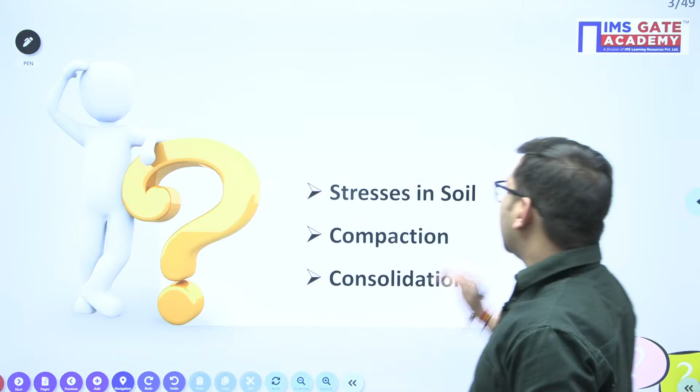Our today's agenda will be first to cover stresses in soil, compaction and consolidation. Out of this topic, consolidation is very much important, it is very much important for your exam. You are going to definitely get one question in GATE 2023 from this particular topic. Hi Sandeep sir.

Okay, we'll move to the next part. If we talk about stresses in soil, what did we study in effective stress? In the effective stress chapter, we studied what will be the stress at any particular depth due to the weight of soil and any particular surcharge load.

But now stresses in soil, again we are studying this topic. Why? In this topic, we are going to discuss what will be the stresses at any particular depth. Your Boussinesq theory will be enough, that I'll explain.

So stresses in soil, we are discussing here that if there is any superstructure load, this load is important for you. When you construct any superstructure over your soil, that building is going to transfer some load to your soil. Now, how much stresses will get generated due to the superstructure load, that we are going to see in stresses in soil.

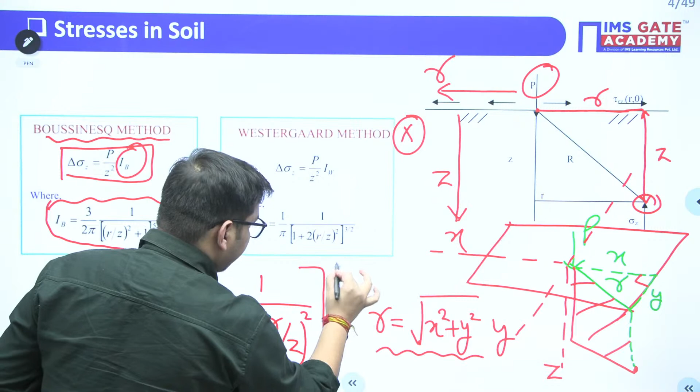It is given by P upon Z square, that is load value divided by depth square into Boussinesq factor, the Boussinesq impact factor IB. It is given as 3 upon 2 pi, into 1 upon 1 plus r by z whole square, whole to the power 5 by 2. This is your IB value. If you multiply it with load divided by this depth square, it is going to give you the stress value at this particular point.

Now, if you need to find out, sometimes it may ask for the shear stress value. This was the normal stress. Sometimes it may ask for the shear stress value. Your shear stress value, it will be normal stress at any particular r by z value multiplied by r by z. So this will be the shear stress at that particular point.

Other than that, there can be different types of loading. The formulas for those are given in your particular notes also. So these are particularly formula-based questions only.

Now our main point of this particular topic is consolidation in soil. So what is consolidation of soil? When there is a superstructure load, due to that there will be generation of stresses. Yeah, we will solve the problems. Definitely we are going to solve the problems. Just I'll give you an insight of 5 minutes, after that we are going to see the questions only.

So if I discuss about the consolidation of soil, we know that when there is a superstructure load, due to that particular stress value, there will be expulsion of pore water from the voids of the soil. Due to that particular stress value or due to this expulsion of pore water, there will be change in volume, or decrease in volume of soil. This particular change in volume or decrease in volume, we call it as consolidation.

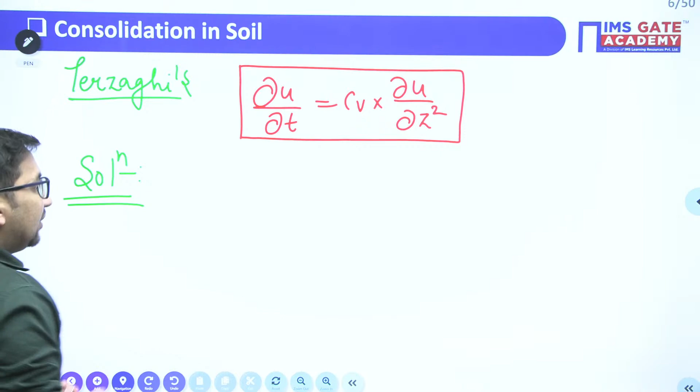So this is the particular Terzaghi's equation. Now if we talk about the solution of this Terzaghi's equation, one of the solutions is your degree of consolidation, mainly represented by U.

What does this degree of consolidation suggest? This degree of consolidation is the proportion of total consolidation that gets completed at any particular instant of time. So degree of consolidation can be said to be whatever consolidation occurs at any particular time divided by total consolidation, sometimes called total settlement. If I represent it in percentage, you can multiply it by 100.

In terms of void ratio also we can explain this, as there will be reduction in the void ratio. You can also explain it with reduction in pore water pressure. Let's suppose Ui is your initial pore water pressure. At any particular time, the pore water pressure reduces from the initial value to this Ut value. How much will be the total reduction? It will be from the initial value to zero. When the excess pore water pressure becomes zero, it means at that point your consolidation process is complete. So this is also sometimes how you represent degree of consolidation.

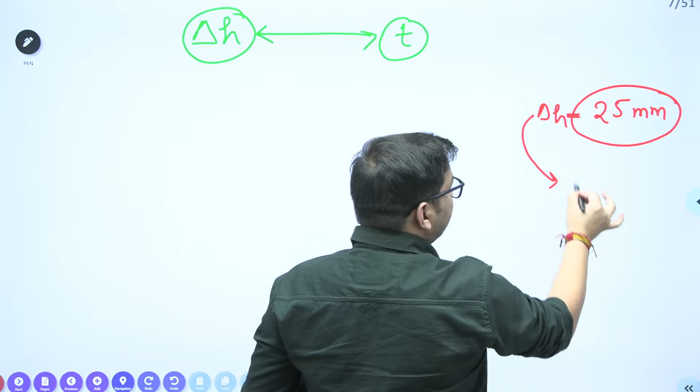Like it will ask you, okay, there is 25 mm of settlement, it will give you the properties of soil, and it will ask how much time it will require for this particular settlement value. This is one type of question.

The second type of question is, it will give you the time. Let's suppose it has given you the time as 3 years, and it will ask you how much settlement will be there in these 3 years. So these are the two types of questions generally asked in your exam.

How to process this type of question? If delta H is given to me, and I'm assuming total settlement is also known to me, I can find out what is my degree of consolidation. That is delta H upon capital delta H into 100, if I'm taking it in percentage. Now this degree of consolidation is related with the time factor. So time factor is the quantity which relates degree of consolidation, or relates this settlement value, with time.

Now your Tv is equal to pi by 4 of U squared. What is this U? U is your degree of consolidation, here in decimals. This particular formula is valid when your U is less than 60%.

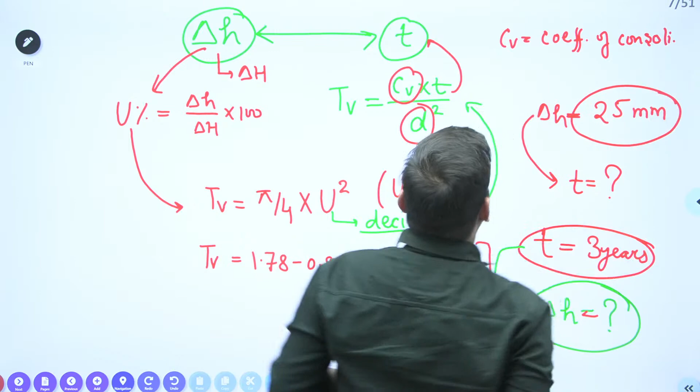Here CV, it is your coefficient of consolidation. What is this D? D is your length of drainage path.

Sir, what is this length of drainage path? It is the particular distance, or the maximum distance which a water molecule has to travel before expelling out from the clay layer. Why am I saying clay layer? As we generally focus about the consolidation of clay layer only, or clay soil only.

When there is a construction, that particular coarse grained soil, that is your sand, it is having a greater permeability. Your permeability of coarse grained soil is more, that is in sand. So whatever consolidation happens in your coarse grained soil, it will be done during the construction period of your building only. Now for us, what is more important?

Let's suppose we have constructed one building today, and after 3 or 4 years, if my soil below our foundation is going to get settled, that is mainly the problem for us. For a civil engineer, that is mainly the problem. We know that the settlement of sand will be completed within the construction period only. It means the problematic soil for us from the consolidation point of view is clay. So that's why we mainly take into account the consolidation of clay only.

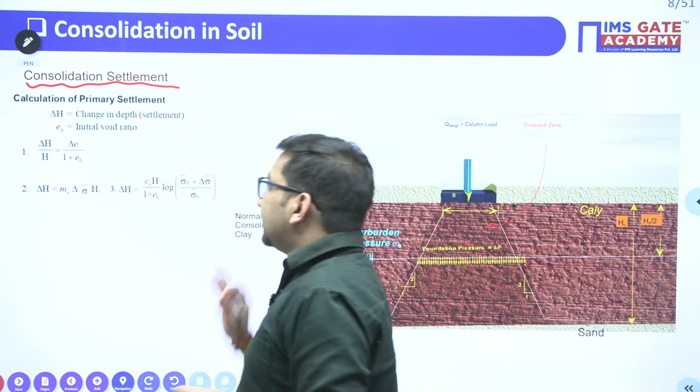Now there are mainly 3 formulas by which you can find out the consolidation. All the formulas are correlated. If this particular formula is known to you, you can derive all other formulas also. So what is your first formula?

Delta H is your total settlement. Remember, this is your ultimate settlement value. So your ultimate settlement upon thickness of compressible layer is given as delta E, change in void ratio, upon 1 plus E naught.

Second formula is your settlement value. It is nothing but thickness of compressible layer into MV. MV is your coefficient of volume compressibility into change in effective stress. Now this is the particular term which is important for you.

All other terms you might be knowing. This is your coefficient of volume compressibility. The formula for this is MV is equal to AV upon 1 plus E naught. And what is this AV? This AV is your coefficient of compressibility, which is nothing but the slope of your void ratio versus effective stress graph.

So this is nothing but change in void ratio with change in effective stress. When the stress value increases, there will obviously be a decrease in the void ratio, given by that particular graph slope, that is your coefficient of compressibility. So these are some coefficients used in this particular chapter. Now this sigma bar, delta sigma bar, this is the particular important term for you.

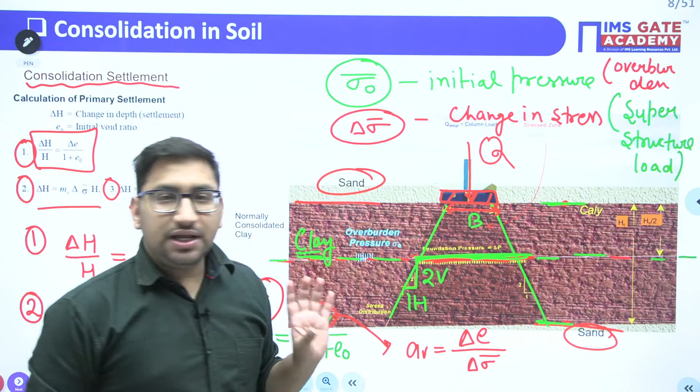So let's suppose this width is B. It means I need to find out this particular dimension. Let's suppose this particular depth is Z, meaning I am moving Z down. If I am moving Z down, this will be 0.5 times Z. Or just for now, I'll write it as n times Z, as this n value can be anything.

I am assuming that it is n horizontal to 1 vertical. Clear? The load distribution is 1 vertical to n horizontal, or you can say n horizontal to 1 vertical, right? So it will be your n into Z. This particular value will also be n into Z.

So you can find out what will be the dimension at the center of the compressible layer. If you divide that particular load with this particular area, you get delta sigma bar. And if you add these two values, you get the final stress value, sigma 1 bar, that is nothing but sigma naught bar plus delta sigma bar. So these are the parameters needed to calculate the settlement value.

Another formula for the calculation of settlement is delta H. These are two formulas, and the third formula is... Let me write all the formulas again. It is delta H upon H is equal to delta E upon 1 plus E naught. This is your first formula. Second formula is delta H is equal to H into mv into delta sigma bar.

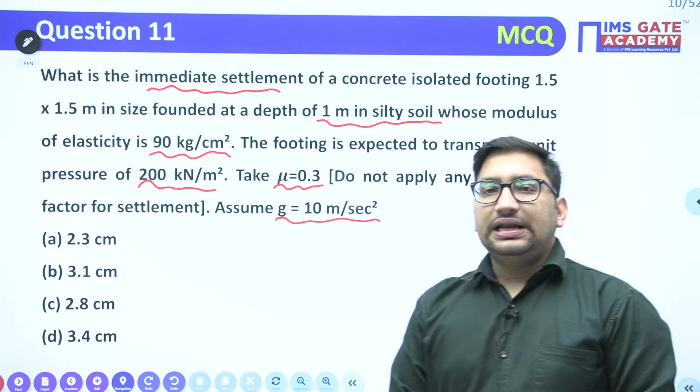If you remember the formula for calculation of immediate settlement, just comment in the chat box, otherwise I will give you the formula. Yeah, Rahul. If you remember the formula, just type in the comment box, otherwise I'll give you the formula. Yes, Rakesh, Prashant. If you are in the live session, just comment so that it will be clear to me that you are also there, right? So just show your presence by commenting on the session.

Okay, I'll just let you know. We know that the immediate settlement, or sometimes we call it elastic settlement, it is your stress value Q into width of foundation into 1 minus mu square into IT upon ES, right? Here mu we take for the soil, E also we take for the soil. Sometimes it may give you these particular values for foundation also, right? So always remember these are the values. Mu is your Poisson's ratio, E is your modulus of elasticity of your soil, right? Q is the pressure value at the base of the foundation, B is your width of foundation, IT is your influence factor, mainly depends upon the shape of your foundation, right?

So this particular value you can take it as 1, as we do not have to apply any correction factor. Clear? Now put the values and give me the answer. You also will need to manage the units, so focus on the units also. We want the settlement value in centimeters.

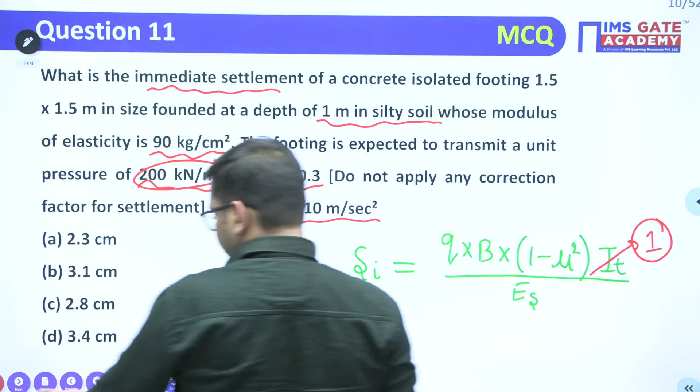The settlement value is Q into B into 1 minus mu square, into IT upon ES. Your Q value is 200 kilonewton per meter square, into 10 to the power 3. It will now be Newton per meter square into 10 to the power minus 4. Now it is Newton per centimeter square, right?

And if I divide it with G, it will be in kg per centimeter square. If I divide it with G, now it will be in kg per centimeter square. So we have converted this into 1 minus 0.3 square upon 90. So this 90 is already in kg per centimeter square, right?

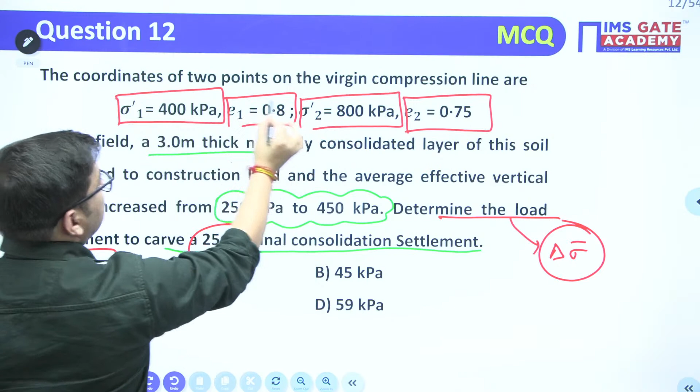Now what are the data given to you? There are some points given on this particular compression line. If I take this in terms of log, I know I am going to get a straight line in that case. Let's suppose this is the particular compression line.

On this compression line, 2 points are given to you. Sigma 1 bar is 400, corresponding to 0.8 void ratio. Your void ratio is 0.8 corresponding to 400, and corresponding to 800 it is 0.75. So when stress value increases from 400 to 800, your void ratio decreases to 0.75.

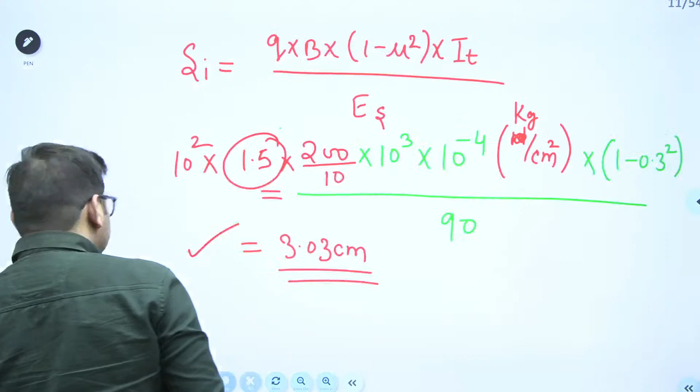Also, it is saying that in the field, when there is construction, the load increased from 250 kilopascal to 450 kilopascal. It means initially, before construction, the stress on the soil was 250 kilopascal. Can I say that this 250 kilopascal is my initial stress? So initial stress, sigma naught bar, that particular value is 250.

Now it is asking that if the settlement value is 25 mm, what will be the change in effective stress, so that the final settlement value will be 25 mm.

Now you know that if I apply this particular formula, delta H is equal to H into Cc, divided by 1 plus E naught, into log base 10 of sigma naught bar plus delta sigma bar, upon sigma naught bar. Out of this, what value is needed?

This E naught value, the initial void ratio, I need. Cc value I need. Sigma naught bar is known to me, 250. Delta sigma bar is what's asked. Is H value given or not?

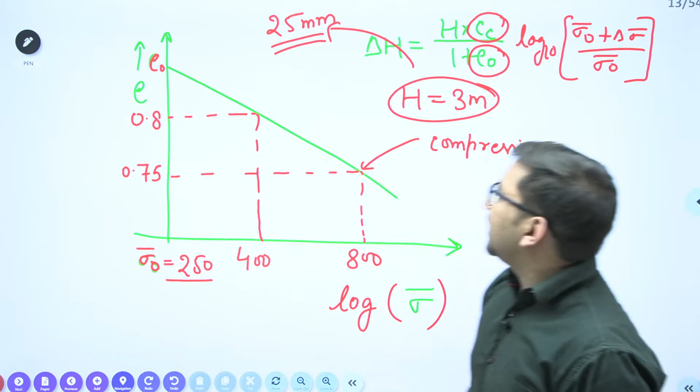Now based on this data, to calculate this change in effective stress, you will need this Cc value and this E naught value. Can you tell me how you will proceed for these two values? What will be this Cc value? Can you calculate it from the graph?

We know that Cc, the coefficient of compression, is nothing but the slope of this particular curve. So if I say this as sigma 1 and this as sigma 2, this as E1, this as E2, I know what the Cc value will be: E1 minus E2, upon log of sigma 2 upon sigma 1.

That is 0.8 minus 0.75, divided by log of 800 divided by 400. Can you give me the value of Cc? Here your multiple concepts will be used. Give me the value of Cc, the coefficient of compression. The answer is 0.166.

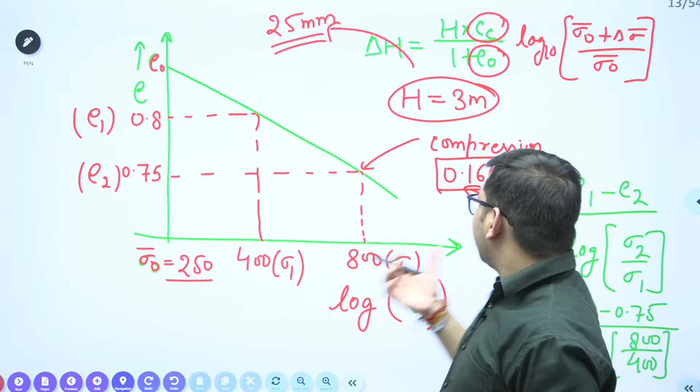Now, can I say that the slope of this particular line is constant? The slope of this particular line is constant, and which is given by this Cc value. I can also write the slope of this particular line for these two values. Here the slope is Cc, here also the slope is Cc. If I write for these two points, can I also write that Cc is equal to...

E naught, this particular value, minus E1, upon log 400 divided by 250. Just comment in the comment box whether it is correct or not. Can I write Cc is equal to E naught minus E1 upon log 400 upon 250 for this particular portion?

Slope is what? It is change in y with respect to change in x, right? So Cc value now is known to you. This particular value is known to you. E1 value is known to you, 0.8. You can find out what will be the E naught value. Give me the value of E naught.

Yes, Prashant, very good. Yeah, thank you, Anjali. Give me the value of E naught.

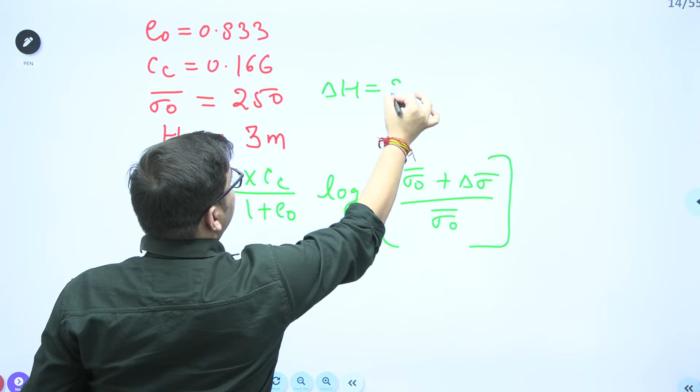Delta H is also given. Delta H is your 25 centimeter, sorry, 25 mm. Clear? I'll just check. It is your 25 mm. Yes, clear? So we can just say it is in meter. So put the values.

It will be H value is 3, into Cc value is 0.166 upon 1 plus E naught value. E naught value is your 0.833, into log base 10 of sigma naught bar value, that is your 250 plus delta sigma bar, which is needed to calculate, upon 250.

Just solve this. You can just solve for this. If you take the inverse of this log, then only you can find out this delta sigma bar value. Just solve this particular question, Prashant.

You are getting it as 59.03. Okay, it is 59.03. So you are getting from here that delta sigma bar is 59.03 kilonewton per meter square.

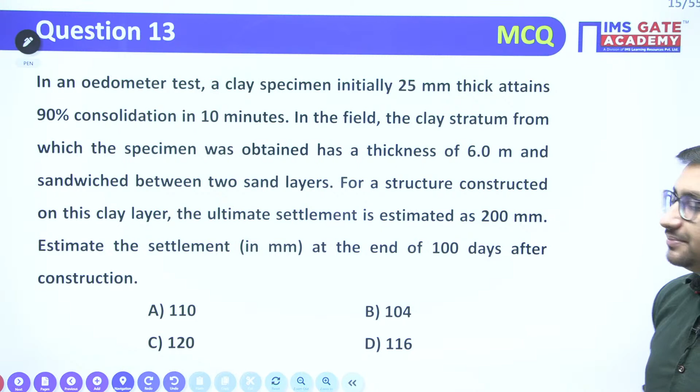And try this particular next question. This is another type of question which can be asked to you in the exam. We have discussed about the different types of questions that can be asked from this particular chapter. This is another part of that. Just try to read and give me the answer. This consolidation chapter is going to be very important for you. These types of questions can be asked to you. So I'll just read the question for you.

I'll simplify this question. In an oedometer test, this is the particular test used for the calculation of your settlement value or consolidation value. A clay specimen initially 25 mm thick attains 90% of consolidation in 10 minutes. Now this is the lab data given to you. Now about field, it is saying that the same clay layer, the clay stratum from which the specimen was obtained has a thickness of 6 meter, sandwiched between two sand layers. For a structure constructed on this clay layer, the ultimate settlement is estimated as 200 mm.

Estimate the settlement at the end of 100 days. Estimate the settlement at 100 days.

So, some lab data is given to you. You have conducted one test in lab and found that the 25 mm thick sample layer will undergo 90% consolidation in 10 minutes. Now, using this lab data, you need to find out what will be the estimated settlement in 100 days in your field. That you need to find out.

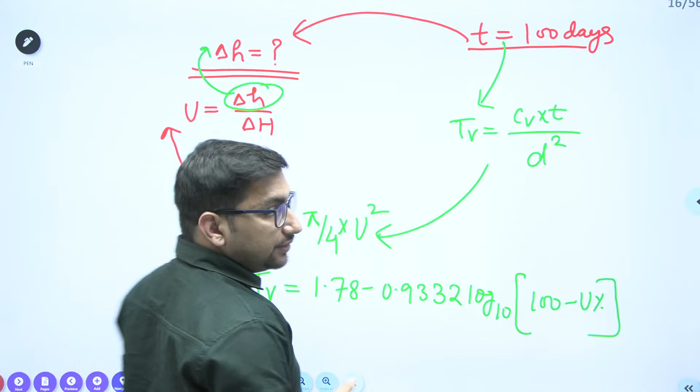From here, once U value is known to you, then you can proceed to U is equal to delta h upon delta capital H, and from here you can find out this.

Now try to see what data are given. Based on this particular chart, we'll try to see what data are given to me. For 100 days I want that TV value, it means I want the CV value. This T value is known, this CV value I have to find out. This D value is your length of drainage path.

Now try to see, for the field data, it is having a thickness of 6 meter and it is sandwiched between two sand layers. So there is a 6 meter thick clay layer, and it is sandwiched between sand. Here also it is sand, here also it is sand. Can you tell me what will be the D value, the length of drainage path?

Just put it in the comment box. If you know the concept of how to find out the length of drainage path, let me know what will be the drainage path in this particular case. I have told you that the length of drainage path is the maximum length which one water particle has to move before expelling out from this particular clay layer.

Give me the answer. It will be 3 meter, right? So I know that the water molecule can remove from the sand layer either at the bottom or at the top. So the particle which is at center has to travel the maximum distance. What will be this? 3 meter. This particular condition we call a double drainage condition.

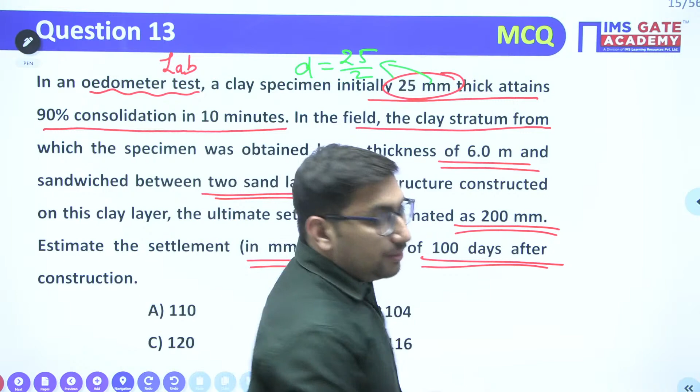There is a sample of 25 mm. If you have taken this particular sample from this clay layer, you have to assume the double drainage condition. So for this particular value, what will be my D value? It will be 25 by 2. You cannot take the 6 meter clay layer to the lab, right? So from that layer you have just taken one particular sample of 25 mm and conducted the oedometer test on that 25 mm thick sample.

So for the lab, what will be the thickness of my clay layer? It will be 25 mm. So what will be the drainage path in lab? It will be 25 by 2, right? It means D value is known to me.

Degree of consolidation is known to me, 90%, and time is known to me. So first I will write for the lab. If I write for lab, what is the data? In lab I know the thickness of sample, that is 25 mm. So from here I can say that my drainage path, it will be 25 by 2 mm.

Degree of consolidation is given to you, that is 90%, and it takes a time of 10 minutes. Now this particular data is mainly given for the calculation of CV. For calculation of CV, this particular formula we can use: TV is equal to CV into T by D square. But to use this formula, I will need this TV value.

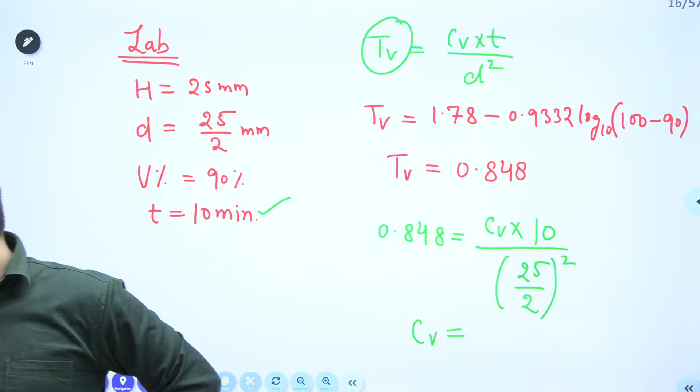It will be in mm square per minute. Give me the value in this particular unit only. What is the CV value you are getting from here?

Yes, Prashant? I am getting it as 13.23. Just also check your answer. Just let me know in the chat box if you are getting the same answer for the CV.

Now, this particular soil you are not changing. Whatever is the soil in lab, same soil it is in the field. For this particular soil only you have conducted the test. It means the CV value in the clay layer which is in lab, this particular CV will be same for yours, and this will be in mm square per minute, right? These were in mm only, your 25 was in mm, so it will be mm square per minute only.

We can change it later, right? Yeah, it will be 13.23 in that case. Right? So this is your CV value. Now I can use this CV value, 13.23, here. I have found this particular value as 13.23.

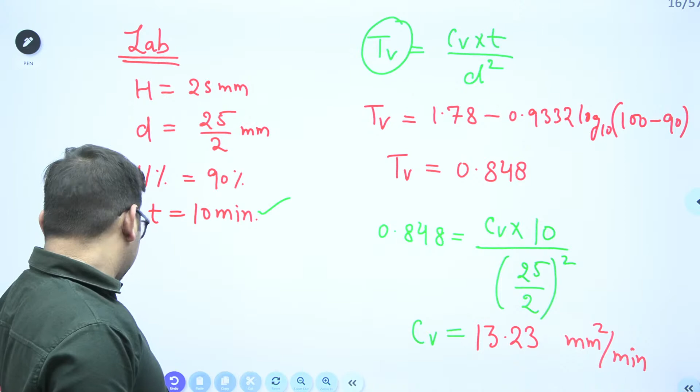You are getting it as mm square per minute, right? Now your d value is 3 meter, convert it to mm, that gives 3000 square, this is your d square. Time is your 100 days, convert this 100 days into minutes, that will be 100 days into 24 hour into 60 minutes. Now all the units are in mm square per minute.

So from here you will get a TV value. Give me the value of TV. Now your CV value is known to you, and the time for which we need to find out the settlement value is 100 days.

Now we are coming to the field conditions. These are the calculations now for field. Once CV value is known to me from the lab data, now I move to the field. What is the TV value you are getting? I'll write it clearly here. So TV is equal to

CV into T by D square. TV value we need to find out. CV is my 13.23, and time is your 100 days, I'll convert it to minutes, right? By D value, D is your 3 meter, that is 3000 mm.

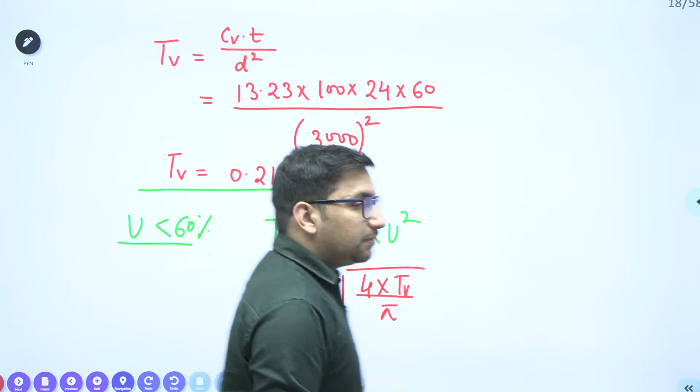Just check what is the value of u corresponding to this TV value. It will be under root of 4 into TV by pi. It will be in decimal, right? If you want to find out in percentage, multiply it with 100. How much value you are getting for this u? This u will be in decimals, if you want in percentage, you have to multiply it with 100.

52.45, it is 52.45. It means it is less than 60%, so our assumption is true, so it means this particular value is correct. 52.45. Now this particular u value is known to me, that is 52.45, or I can write in terms of decimal.

0.5245. Clear? I need this delta H value. What is the total settlement? Ultimate settlement is estimated as 200 mm. So this value is your 200 mm.

Now give me the delta H value. Give me the delta H value. Yeah, hi, good evening, Himanshu.

From here, give me the small delta H value. What will be the settlement in 100 days? It will be 200 multiplied by 0.5245, it will be just 105 or around that. Just check, or 103. Clear? 200 multiplied by 0.5245, what is the value? 104.9 or 105 around, right?

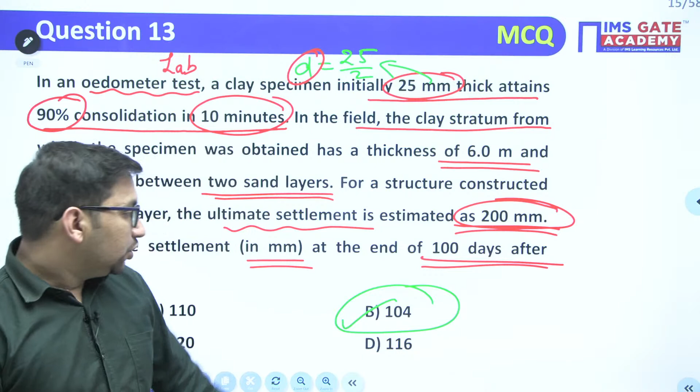So we can just check with the options. So 104, that is the most appropriate answer. So the correct answer for this particular question will be your option number B. Clear? I hope the solution to this particular question is clear.

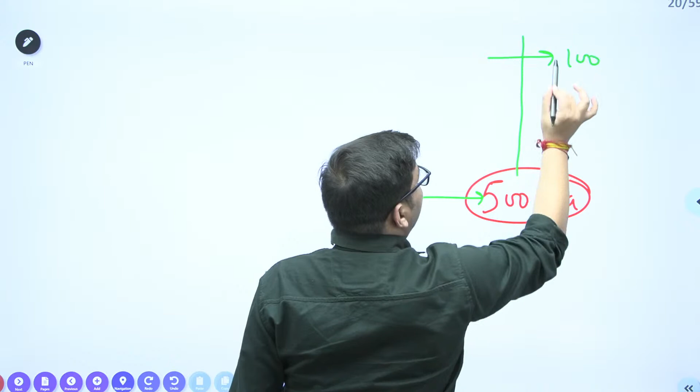If I am saying the stress value, let's suppose 500 kilopascal, any material having this particular strength - I can load this material safely with 100 kilopascal, with 200, with 300, with 400. But the maximum load which this particular material can take without failure, that will be 500 kilopascal. So from the safety point of view, I can say that this is the maximum stress value at which my material is safe.

But if we talk about the failure, what can we say? If I apply a stress of 1000 kilopascal on this particular material, it will get fail. It will get fail even at 800 kilopascal, even at 700 kilopascal. So what will be the minimum stress value at which it will get fail? That will be the 500 kilopascal value.

So when it is safe, you have to take the maximum stress value at which it is safe. From the failure point of view, you are saying it is the minimum stress value. So we have different types of strength: compressive strength, tensile strength, shear strength. Why are we concerned about the shear strength of soil? As we know, soil fails in shear. When you apply the vertical load over this, your particles are going to slide over each other, and this type of failure you call shear failure. That's why we are more concerned about the shear strength of soil.

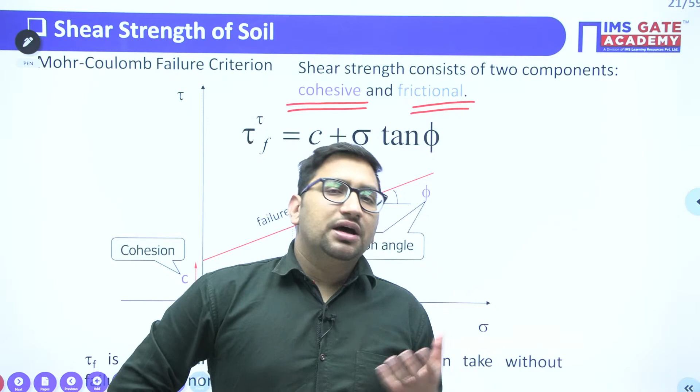Now this particular shear strength of soil, in any particular soil, it will be due to two reasons: it will be due to cohesion, that is the interparticle attractive forces between the particles, and it will be due to friction. There is one more factor, that is interlocking between the particles, but by now we don't have any particular methodology to measure the strength due to interlocking. So we consider only the strength due to friction and strength due to cohesion.

Cohesion is the force of attraction between like particles. Here our particles are soil, so whatever is the interaction force between the soil particles, that will be our cohesion. According to Mohr-Coulomb, the shear strength of soil is given as C plus sigma tan phi. From this particular graph also you can see there are two factors. One is cohesion - remember that this particular cohesion is independent of the loading.

The main difference between soil and any other material is: here the strength also depends upon the loading. If we talk about steel or concrete, you write that the characteristic strength of M25 concrete is 25 megapascal - it means whatever is the loading on that concrete, its strength is going to remain the same, it will not change. But here you can see that the strength of soil - the cohesion factor is independent of loading, but the friction parameter is dependent upon the loading.

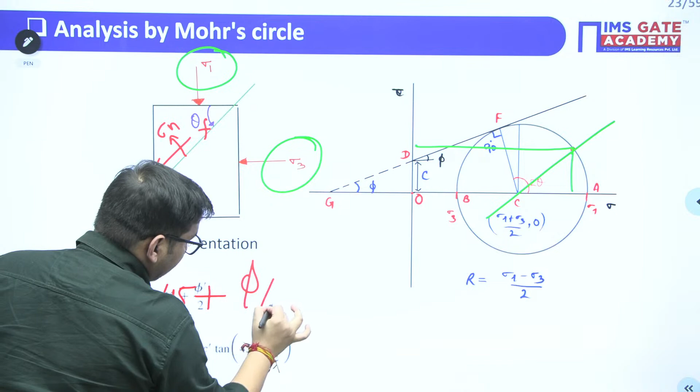Suppose you have applied this loading and due to this loading, the soil fails along a particular plane — I'm calling this theta at failure. This theta at failure is given as theta at failure equals 45 plus phi by 2. What is this phi? This phi is the angle of internal friction. Let's suppose this is the shear stress value.

This is the normal stress value, right? So there will be one resultant. When this shear stress value on this particular plane keeps on increasing, this resultant will shift from the normal towards this tau value. If initially tau value is 0, the resultant will be in the direction of sigma normal. Now as you keep on increasing the shear stress, your resultant is going to get shifted in this direction. At any particular value of this angle made with the normal, your material is going to get fail.

So this particular angle we call it as a phi value. This is the maximum angle which is made by the resultant with this normal, and this you call it as the angle of friction. Here we call it as the angle of internal friction of soil. Clear?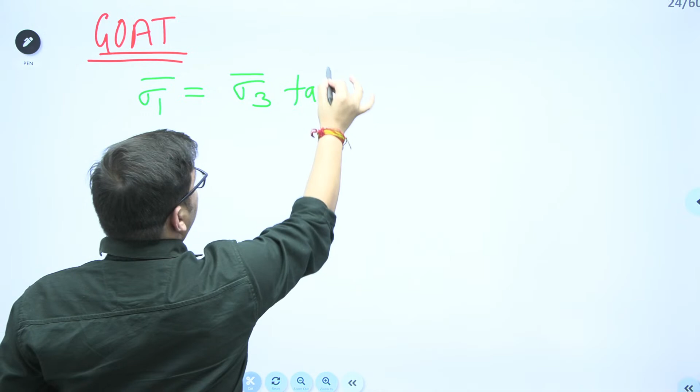This is a very important relation which will be used in this particular chapter and all other chapters. I call this particular equation personally as the GOAT equation - the greatest of all time equation, you can say, for your GATE exam. So what is this particular equation? It is sigma 1 bar is equal to sigma 3 bar tan square of 45 plus phi by 2, plus 2c tan of 45 plus phi by 2.

So wherever you will find out the effective stresses, wherever you will find out the principal stresses, this is your major principal stress sigma 1, sigma 3 is your minor principal stress. In whatever question you find the principal stress, you need to find the relation between phi and c, that is phi value and c value. These are your parameters for the calculation of strength. So if sigma 1 and sigma 3 are known to me, I can find out what will be the c and phi value.

These are the two unknowns. If sigma 1 and sigma 3 are known to me, I can take two datas, so I will get two equations in terms of sigma 1 and sigma 3. From there I can find out what will be the c and phi value. Once c and phi value are known to me, I can find out what will be the shear strength of soil at any particular normal stress value.

Now the most important part from this particular chapter - one is this equation, you can remember. Second most important part from this chapter, that will be your triaxial test. Now try to understand what this triaxial test suggests.

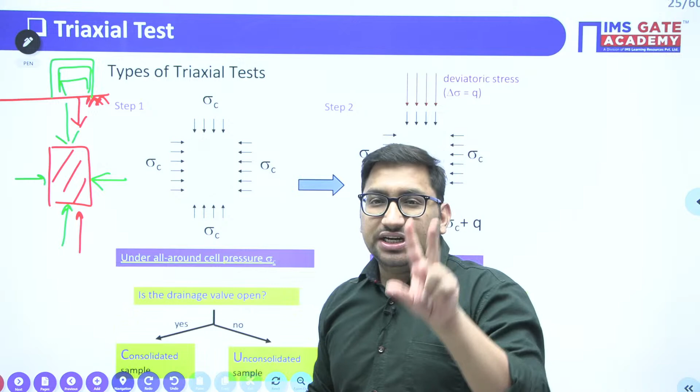This particular test is conducted in two phases. First stage is your confining pressure stage, in which you are applying the all-around water pressure on this - just like this soil material was subjected to confining pressure from all directions. To implement this value in the lab, we have subjected our stress element to water pressure. This first stage we call the confining pressure stage, where we have applied this sigma c value.

In the second stage, now the stress due to this particular building is mainly responsible for failure. If you keep on increasing this building load, there will be one particular stress value at which this material will get fail, and that particular stress value we need to find out. So once the first stage is completed, we move to stage number 2.

Now we have applied a deviatoric stress. This deviatoric stress is applied gradually, not suddenly. You keep on increasing it - let's suppose first you apply 1 kilonewton, then 2 kilonewton, then 3 kilonewton. You cannot apply a stress value directly, you might be applying weights. At one particular stress value, this material will get fail. At that point, whatever is the stress value, that will be my deviatoric stress.

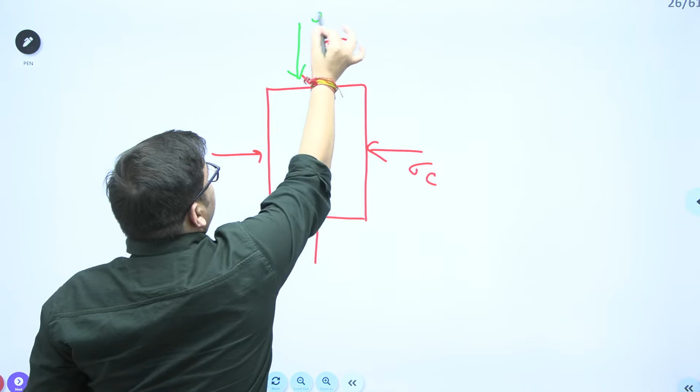You have applied its sigma c value. This was your first stage. At this point, your first stage gets completed. After that, you started giving a deviatoric stress value. You keep on increasing this value, right? And at the time of failure, when just this sample will get failed, you will note down what is this sigma d value.

Clear? This condition I can represent also as this: this value sigma d plus sigma c, can I say it is my major principal stress, that is sigma 1, and this is my sigma 3, right?

So the confining pressure you have applied is known to you. At what stress value your material gets failed is known to you. It means sigma 1 and sigma 3 is known to me. Once sigma 1 and sigma 3 is known to me, I can easily draw the Mohr circle.

As for drawing any Mohr circle, what will be the data needed? The data needed will be the center coordinates and the radius of the circle. We know that the center of the Mohr circle is at the coordinate of sigma 1 plus sigma 3 by 2, comma 0. And what will be its radius? Its radius will be sigma 1 minus sigma 3 by 2. Clear? It means radius is known to me, center is known to me.

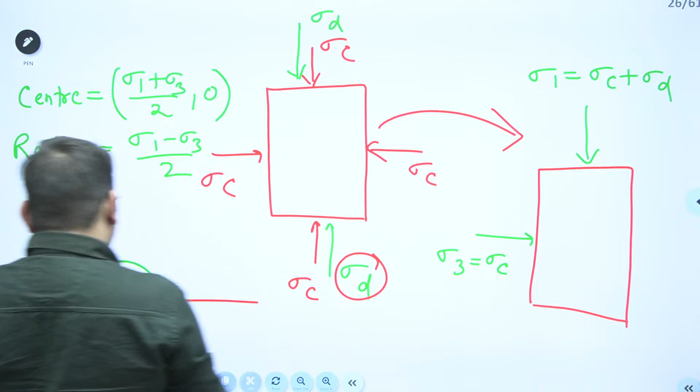I can draw this Mohr circle. For any other data, now I will change this sigma c value and repeat the test. Again I will get one more Mohr circle for a different sigma c value. Again I will change this sigma c value, I will get new sigma 3, I will get new sigma 1. Corresponding to that, I can again draw one Mohr circle.

And if I join these Mohr circles, the common tangent to these Mohr circles will give me the failure envelope, right? So I will get this C value, I will get this phi value. Once C and phi is known to me, I know that shear strength of soil is C plus sigma tan phi.

It means from here I can find out what will be my strength. Is that clear? This is the graphical method.

I can also use, once sigma 1 and sigma 3 are known to me for a second value, I can use that particular Coulomb equation. Sigma 1 value, sigma 3 value are known to me, right?

If sigma 1 and sigma 3 in test number A correspond to sigma 1A and sigma 3A, I conduct the test again and I will get for sample number B, sigma 1B and sigma 3B.

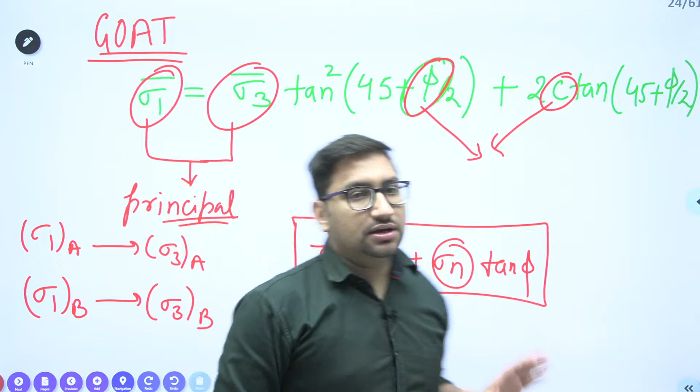So these are the two equations with two unknowns, C and phi. In the numerical, you have to find out this C and phi value by using these equations. As you will not get any particular graph paper in the exam, generally we use these analytical equations for calculating this C and phi value.

Now there can be 3 number of tests based upon the drainage condition. If in the starting stage you are not allowing the drainage, you call it unconsolidated. But if you are allowing the drainage, if you are allowing the water to escape from the soil, it will be consolidated. Similarly, during the second stage, either you call it the deviatoric stage or sometimes the shearing stage, as at this particular stage your soil is going to shear.

Here also, if you are not allowing the drainage, it will be undrained condition. If you are allowing the drainage, it will be a drained condition. So based on the drainage, your C and phi value are also going to get affected. So you are having these number of tests.

You are having CD test. I will start with UU test. Your UU was unconsolidated undrained test. It means during the first stage, during the shearing stage also, you have not allowed the soil to get drained. Second U, that is unconsolidated, undrained - in second stage also you have not allowed the soil to get drained.

Second is CU test, that is consolidated undrained test, right? Third is your CD test, that is consolidated drained test. So these are the three tests which you generally conduct on your particular soil during this Triaxial test. These have their application in different types of soil.

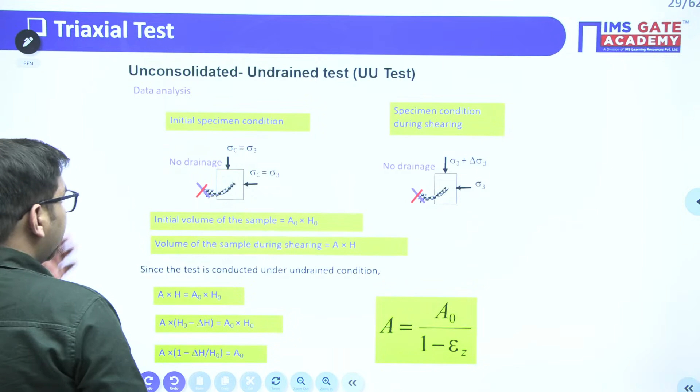Now we were talking about finding out what is the deviatoric stress value. We know at what particular load my soil fails, divided by area at failure. Now this area at failure is not known to me, but the initial area is known to me when I have prepared the sample. So from there you can find out what will be the particular area at the time of failure.

So this is your area at failure: A0 upon 1 minus epsilon z, meaning the decrement or the strain value along length. This is mainly applicable for UU test, as in UU test there will be no volume change. In any other test, if there is a volume change, the area at failure will be A0 into 1 plus or minus volumetric strain upon 1 minus strain in length, or strain in z direction.

Now this sigma d value which you are getting at failure, you call it the confined compressive strength - confined compressive strength.

Confined compressive strength - remember this is not the strength of soil. What mistake do students make? Sometimes it is asked to find out the confined compressive strength, which means it is asking for the sigma d value. You know the sigma d value is different, your tau f value is different. So if it is asked to calculate the confined compressive strength, it means it is asking for the sigma d value. I hope it is clear.

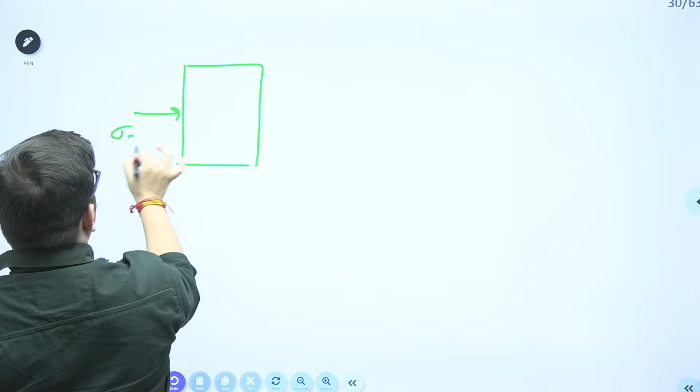There is one particular special case of this test in which your confining pressure is 0. If sigma c is 0, we can say that there will be only sigma d, that is also in vertical direction. So can I say that sigma 1 will be equal to sigma d and sigma 3 will be equal to 0.

In this particular case, my sigma d value is known as your unconfined compressive strength. As there is no confining pressure, we call it an unconfined compressive strength test, and this particular value you call unconfined compressive strength. You also use the abbreviation UCS value. I hope it is clear.

Now one special case I want to discuss: if I use the equation sigma 1 is equal to sigma 3 tan square 45 plus phi by 2, plus 2c tan 45 plus phi by 2 - now I am using it for this particular unconfined compressive strength test. It means my sigma 3 value will be 0. If I assume that my soil is purely cohesive, it means phi value is 0.

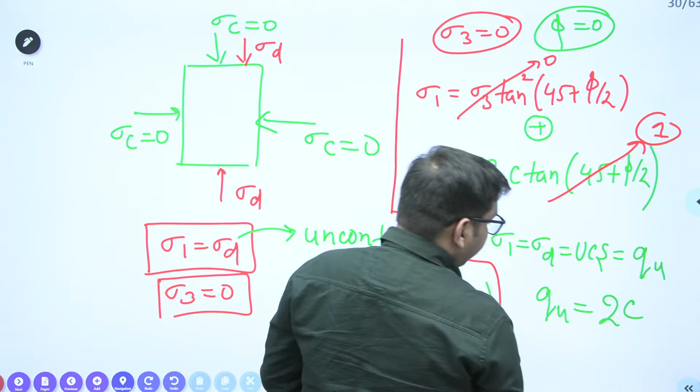So for this particular special case, what will be the value? I can say sigma 1 is equal to sigma deviator, is equal to nothing but UCS value. We sometimes represent it with QU. So what will be the value of QU? This value will be 0 at sigma 3 is 0. This particular term, tan square 45 plus phi by 2, will be 1 as phi value is 0. So QU is equal to 2 times of cohesion. So here unconfined compressive strength in case of purely cohesive soil will be equal to 2 times the cohesion value. Clear?

Now next topic is your vane shear test. In this particular test, you just insert the vane in the soil, you rotate, you will get a particular torque value at which your soil will get sheared. Based on the diameter of this particular shaft and the height of that shaft, we have derived one relation for calculation of shear strength of soil.

Now remember that this particular shear strength of soil formula has one assumption: that the stress distribution is uniform over the top, over the bottom and over the sides. Then in that case only you get this particular formula. You might have remembered it like that: tau f is equal to T upon pi d square times h by 2 plus d by 6. So this is the particular formula when your stress distribution, or shear strength, is uniform.

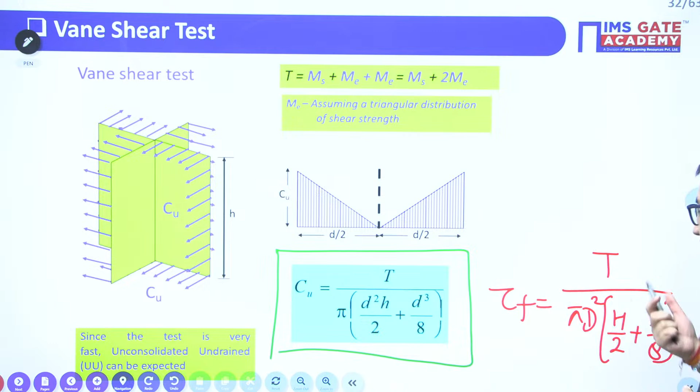So in that particular case, this will be your shear strength of soil. It will be T upon pi d square times h by 2 plus, in case of d by 6, it will now be d by 8. So T upon pi d square h by 2 plus d by 8. This particular formula will be applicable when your stress distribution at top and bottom is triangular - it is 0 at this particular shaft point and maximum at the end of this particular blade. So this is also one important formula for you.

Now we'll move to the questions. Now it's time for the questions. See the question and try to find out what is asked in the question and how you will proceed. Whatever points are required for this particular calculation, I have already given to you. Just give me the answer fast so that we will be able to cover the foundation part also.

Just give me the answer. Yeah, thank you, Sandeep sir.

What it is asking in the question and what you need to find out, just calculate.

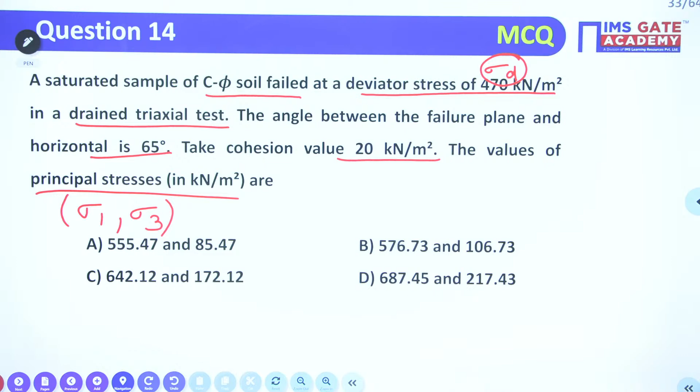Just give me the answer. By seeing the data, just give me the answer if it is the value of theta or the value of phi. We know that theta is the angle of failure from the principal plane, right?

So it is given that the angle between the failure plane and horizontal, as we are mainly assuming that this is my major principal plane, right? We are taking it as sigma 1, this is sigma 3. So this is my major principal plane, this horizontal line, and if this is the failure plane, this particular angle we call it theta, theta at failure. It means this is the value of theta, yes.

So theta value is given to me, that is 65 degree. What was the C value?

C value is also given to me as 20 kilonewton per meter square.

Now if we see how many unknowns are there in this particular equation, there are three unknowns. With one equation, how many unknowns can we find out? Only one unknown, yes or no? We can only calculate one unknown using this particular equation. It means I have to eliminate these unknowns.

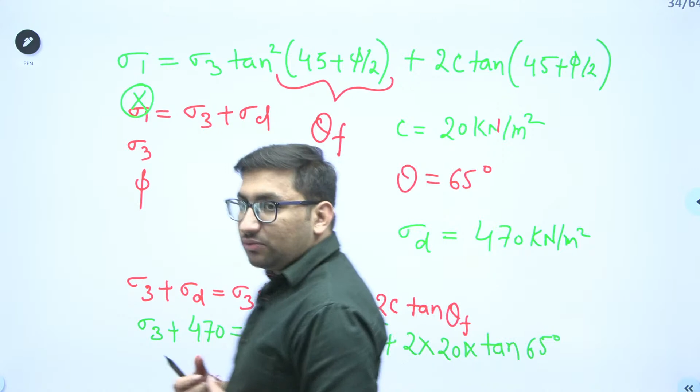Now there is only one unknown, this sigma 3. Give me the value of sigma 3 from this particular equation. Solve this particular equation and give me the value of sigma 3. I'll also check what answer I am getting. I am getting it as 106.76. Just let me know in the chat box if you are getting the same, 106.76 kilonewton per meter square.

Are you getting the same answer? Once sigma 3 is known to me, I can find sigma 1, which is nothing but sigma 3 plus sigma d. Sigma 3 is 106.76, sigma d is 470. So what will it be? It will be 576.76. Yes, 106.76, if we add 470, it will be 576.76. Clear?

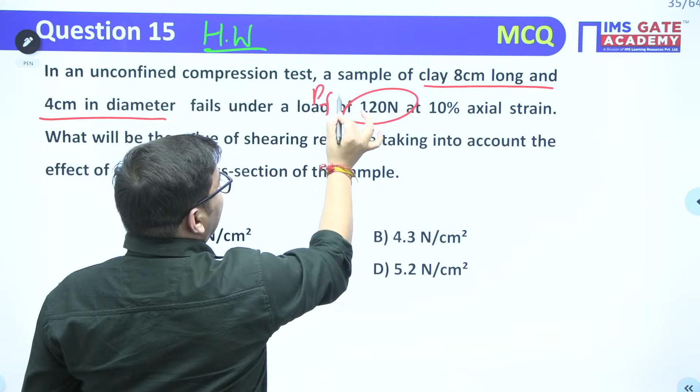What is asked in the question: in an unconfined compressive strength test, the clay sample having a length of 8 cm and 4 cm diameter fails under a load of 120 Newton. It means this is the P, load at failure value is given to you, at 10% axial strain. It means this is epsilon Z, given to you as 10%. What will be the value of shearing resistance taking into account the effect of change in cross section of the sample?

Change in cross section of the sample, right? So the best trick in this particular question is what? Once you solve it, what you will get after solving this particular question is the QU value first. QU will be your unconfined compressive strength, that will be P at failure upon area at failure. Area at failure you can calculate. This is the diameter. It means pi by 4 d square, it will be your A naught value, pi by 4 into d square, it will be your A naught value. So once A naught value is known to you, you know that area at failure is equal to A naught upon 1 minus strain in Z length.

Area at failure will be known to you, P at failure is known, QU is known to you. But it is not asking for unconfined compressive strength. It is asking for the shear resistance. Remember, it means shear strength of soil.

If it is a clay sample, shear strength of soil will be what? Cohesion. As we know, tau f is equal to C plus sigma tan phi. If phi value is 0, my strength of soil in clay soil will be equal to cohesion. QU value is known to me, strength of soil is equal to cohesion. We have derived one relation: QU is equal to 2 times of C.

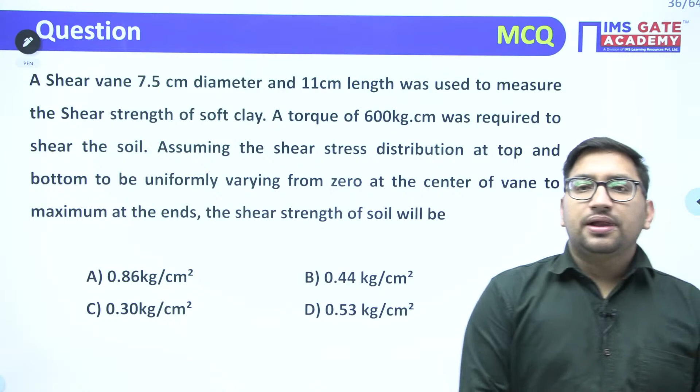Clear? Find out the answer and let me know in the chat box. This will be homework for you. If this is clear, let me know in the chat box. Is that question clear to everyone? Now try to answer this particular question. Read the question and try to answer.

Read the question and try to answer. A shear vane 7.5 centimeter diameter and 11 centimeter length was used to measure the shear strength of soft clay. A torque of 600 kg centimeter was required to shear the soil. Assuming the shear stress distribution at top and bottom to be uniformly varying from 0 at the center of the vane to the maximum at the ends, the shear strength of soil will be.

By reading the question, let me know first: the stress distribution, is it uniform or is it triangular? Which case will be applicable here? In this particular question, is your stress distribution uniform or triangular? Just let me know by seeing the data. Is your stress distribution uniform or varying?

Yes, Prashant. It is saying that it is varying, right? It is uniformly varying, 0 at the center. Let's suppose this is the particular vane. So it is varying like this - maximum at the ends and 0 at the center.

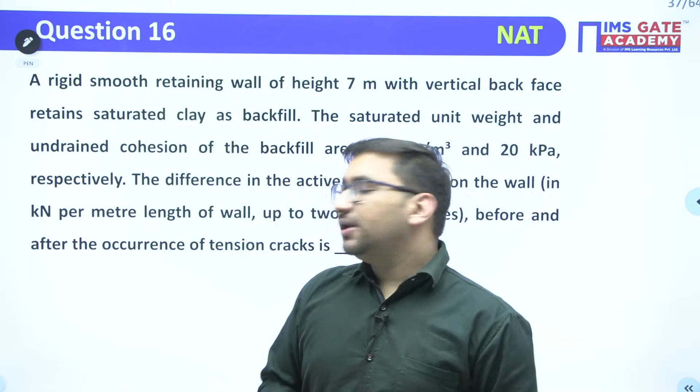Now, next we will move to the application part of soil mechanics. Up to this point we have discussed soil mechanics; now it is the part where you have to apply the concept of soil mechanics. So we are going to discuss the concept of earth pressure in any particular wall - what will be the lateral earth pressure due to soil. This concept is mainly used for the design of retaining walls. Let's suppose there is a particular retaining wall - I'll explain some of the concepts.

Let's suppose this is a particular retaining wall, or retaining structure. What is the work of this retaining structure? The work of this retaining structure is to retain this particular soil. So let's suppose this is your soil. We call this particular soil as a backfill. So this is your retaining structure.

It can be a retaining wall, sheet pile wall, anything. This particular soil, we call it as a backfill.

If this particular wall is holding this particular soil, it will apply a pressure on this wall in the lateral direction. This is nothing but your earth pressure. I'll call it sigma horizontal. This sigma horizontal is a function of your vertical stress, sigma V.

Your sigma horizontal is nothing but equal to K times your sigma vertical. It is the function of your vertical stress. The calculation of this vertical stress we have already done in the effective stress chapter. How to calculate the vertical stress at any particular point is known from that chapter. Now here we have to apply this particular concept.

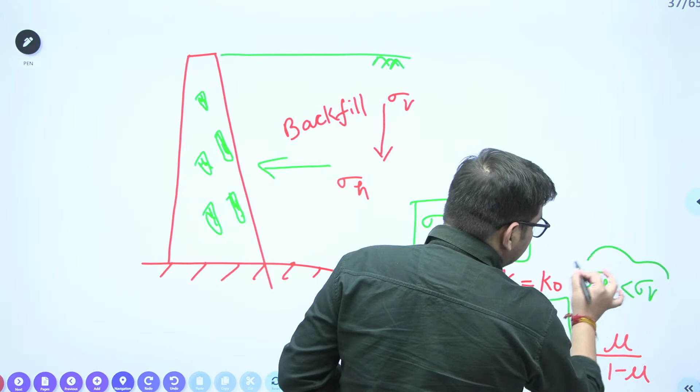Also it is given as mu upon 1 minus mu. We know that the maximum value of mu can reach 0.5, that is also in the ideal condition. It means this mu value will be less than 0.5 only. So if you find out the ratio of K naught, it will always be less than 1. If K naught value is less than 1, can I say that my sigma horizontal will be less than sigma vertical? So at rest, my sigma horizontal will be less than my sigma vertical value.

From here also you can see it is 1 minus sin phi. Now sin phi value will be 1 at 90 degrees, but there is no particular type of soil in which your friction angle will be 90. It means this particular value cannot be 0, your phi value will be 0, and in that case this K naught will be 1 only. So your sigma horizontal will be less than, or it can be equal when your soil is purely cohesive.

Now if your wall is moving away from the backfill, some of the pressure will get released. It means your horizontal stress value is going to get decreased. Your sigma vertical is constant, your sigma horizontal gets decreased. So the second condition, when wall is moving away from the backfill, that will be your active condition. In this particular case also, my sigma horizontal will be less than sigma vertical.

Also I know that sigma horizontal is a function of sigma vertical. Now this coefficient I am calling Ka. So this Ka is your active earth pressure coefficient, given as 1 minus sin phi upon 1 plus sin phi.

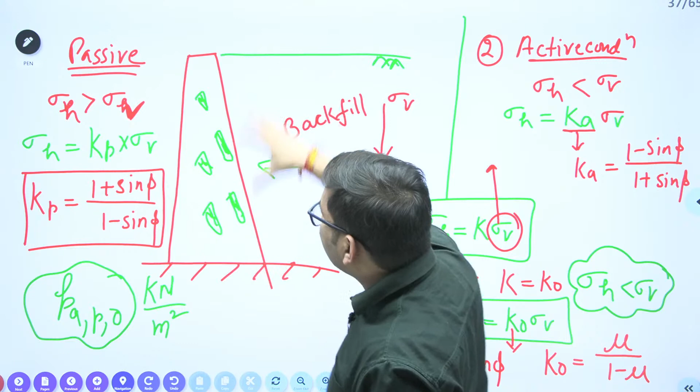This pressure value will be different for different depth. At a particular depth it will be different, at the base this pressure value will be different. But due to this whole backfill, what will be the force applied on this wall? That we call it as thrust. And this thrust value can be asked for active case, for passive case, or any particular value.

For the rest case also. So simply, what will be the thrust? Thrust will be the area of your pressure distribution diagram. So simply draw the pressure distribution diagram. What is the different pressure value which is changing with the depth? The area of that pressure distribution diagram will give you the thrust value.

Clear? I hope all these concepts you have already studied, right? Just I have given you the insight of this particular concept also. Now try to find out this particular question.

Try to find out this particular question. This is from your earth pressure value, you need to find out in the cohesive soil. So I have taken the most generalized case. In this particular case, our both concepts, when there will be formation of tension crack and when there is no tension crack, it will be clear.

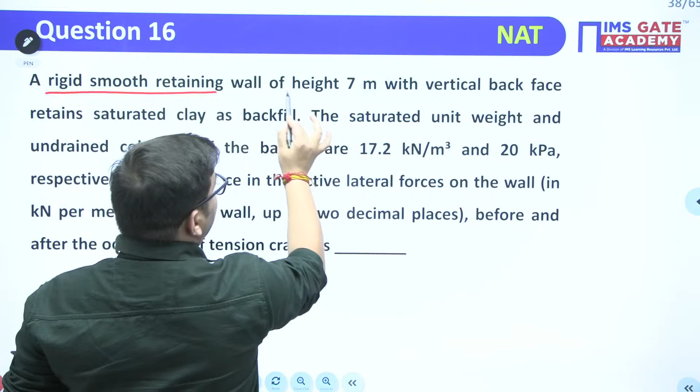What it says: a rigid smooth retaining wall of height 7 meter with vertical back face retains saturated clay as backfill. The saturated unit weight and undrained cohesion of the backfill are 17.2 and 20 kilopascal. The difference in the active lateral force, it is asking for the force value on the wall in kilonewton per meter. You can remember this unit, kilonewton per meter.

Up to 2 decimal places, before and after occurrence of tension crack. Clear? So this is the particular question. It is also asked in your GATE previous year. But this is the particular generalized question in which you will get the idea of what will happen before tension crack and what will happen after tension crack.

So I'll just explain this concept also. Let's suppose this is your particular wall. This is your retaining wall. It is having this backfill.

Now we know that in case of cohesion, what will be your sigma horizontal value? That is the earth pressure value. I am writing it as, for active condition, PA. It will be K into sigma vertical minus 2c under root of K.

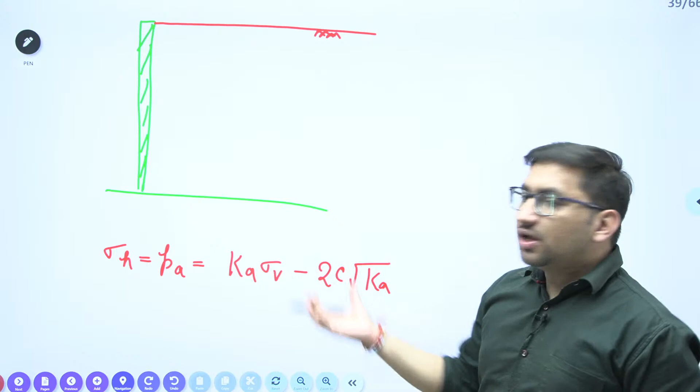Now this particular formula is also derived from that Bell's equation only. When you will put, as this is the active case, my sigma horizontal will be sigma 3. As sigma horizontal is less, my sigma vertical will be sigma 1. So if you put sigma 1 as sigma vertical and sigma 3 as sigma horizontal, you will get this particular relation, where this K is nothing but 1 minus sin phi upon 1 plus sin phi.

Or you can also call it, in that particular equation, this term as 1 upon tan square of 45 plus phi by 2. If you remember that Bell's equation, 1 upon tan square 45 plus phi by 2 is nothing but 1 minus sin phi upon 1 plus sin phi.

Clear? Now, if I use this particular equation, first I am taking the case of no tension crack. So if there is no tension crack, what will be my pressure distribution?

My pressure distribution at this particular point, the sigma vertical will be 0 at top. It means this term will be 0, so there will be a negative pressure. I am representing in this direction the negative pressure. So my stress distribution will be something like this. This is negative pressure, it means this is your tension and this is mainly compression. This particular height up to which there will be a tension zone, we call it as depth of tension crack. Due to this particular tension zone only, there will be a generation of tension crack.

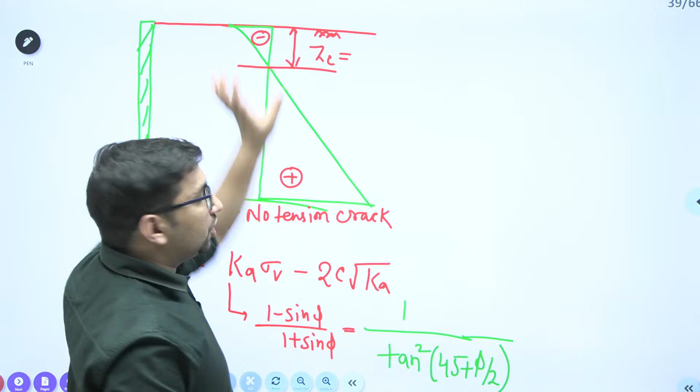But if there is no tension crack, you will get this particular zone, and this ZC is given by 2c upon gamma under root of K. At the same depth ZC, again there will be the same value. This is negative, this is positive.

It means this negative and positive area get cancelled out. So if I want to find out what will be the force in this wall, I can use the area of this stress diagram. What was this particular value? It was minus 2c under root of K. This will be your plus 2c under root of K.

What will be this base width? This base width will be what? This base width is K into sigma vertical. This will be your K into sigma vertical minus 2c under root of K. So area of this trapezoid is going to give me the force value.

For calculation of area, I will need this particular depth also, which is 2 times of ZC. We call it sometimes the depth of unsupported cut, HC value, as up to this particular depth there will be no pressure on this wall, since the negative and positive pressure will get cancelled out. So there will be no force on this wall, so we call it a depth of unsupported cut. So I can say that this particular depth remaining, if it is H, now it is H minus 2 times of ZC.

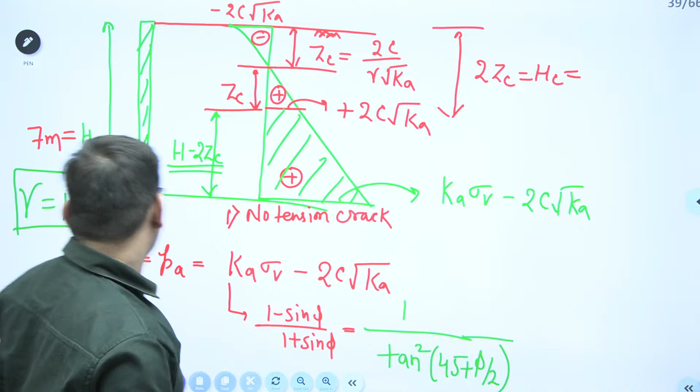Where will this gamma value be needed? Once this gamma value, it will be needed for the calculation of your ZC. I think cohesion value is also known to you, that is 20 kilopascal. So this data is given.

So you can find out the ZC value. ZC value is 2C upon gamma under root of K. C value is known to you, gamma is known to you, K is known to you. I'll just write this particular final value, as if you have calculated, you can also give me the answer. So ZC I am getting.

I'll just write the data now here. What are the data I am obtaining? ZC I got as 2C upon gamma under root of K, so ZC I am getting 2.325 meter. So HC value will be what? HC I am getting it as 4.65 meter. Just check with your calculations. HC I am getting it as 4.65 meter.

Now I can calculate this value 2C under root of K. This 2C under root of K, I am getting it as 40. And K into sigma vertical, it will be, sigma vertical is gamma into H, gamma into this height. Height is known to me as 7, K is known to me, cohesion value is known to me. I am getting this particular value as 80.4.

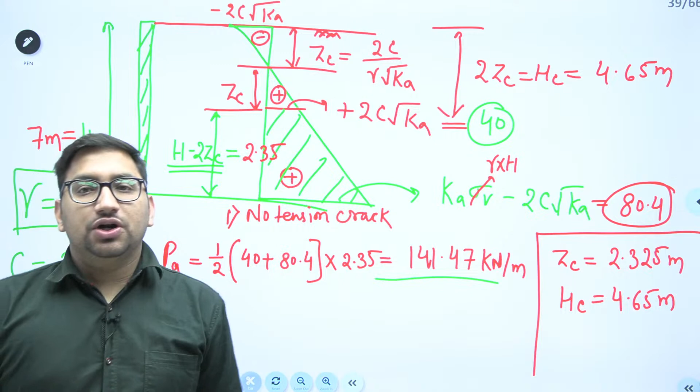Just let me know if the case of no tension crack is clear or not. Is it clear, everyone? Then we can proceed to the next case, when there will be a tension crack. Just let me know in the chat box if this particular concept of no tension crack is clear or not. Tell me.

Okay, now what will happen if there will be a tension crack? Now I'll draw the diagram here so that you'll be able to compare these two. If there is a tension crack, it means up to this ZC height there will be a tension crack developed. Up to this height a tension crack gets developed. It means this particular soil loses its contact with the wall. So due to this particular soil there will be no pressure, only this pressure will be there. So it is 0 here, this particular depth is ZC, and this is your stress value now.

Now the area of this particular stress diagram, it will give you the earth pressure force. This is the second case, of tension crack. This is the particular area for which you will get the stress value. So PA will be what?

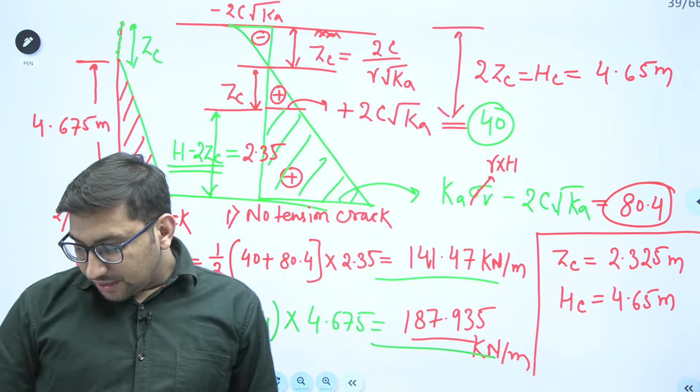46.5. I will also check if I am getting the same answer or not. Yes, it is 46.5 kilonewton per meter. Right?

Now I will give you one more approach. This is the particular approach I have just shown here so that it will be clear to you what are the changes when there is no tension crack and when there is a tension crack. But if you are solving this particular question in exam, you have to be very smart. Now here you can use your aptitude. If you see these two diagrams, can I say the change in these two diagrams is only this particular top part?

The only difference in these two diagrams is this particular top part, this particular triangle. If I draw it separately, this particular triangle is the only change, which is having a height of ZC, and this top width is minus 2c under root of k, which we have calculated as 40. ZC value we have already calculated, ZC value is 2.325.

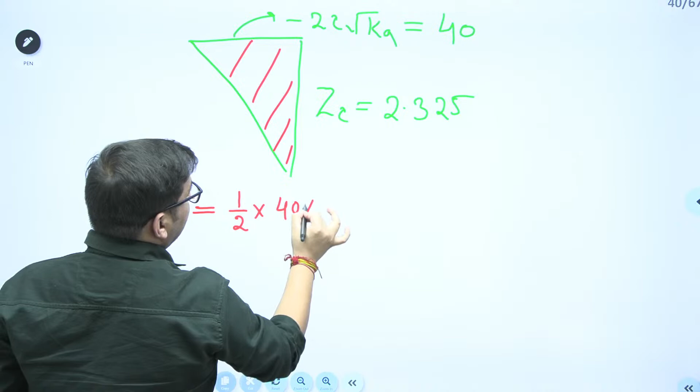We need to find out the change, so this is the only change between these two diagrams, when there was no tension crack and when there is a tension crack. So if I calculate this particular area, it means this is the earth pressure force value which gets changed. Now just calculate the area of this particular triangle. As I am talking about the change, there is no point of taking the negative sign. So it will be half base, that is 40, into height, that is 2.325. Can you give me the answer? What is the area of this particular triangle? Are you getting the same as 46.5 or not?

Are you getting the answer as 46.7 or 46.5? That is in kilonewton per meter. So in the exam, you have to think like this only, right?

If you proceed with this type of process, it will be very lengthy, but there was no need to do all these things. I have just explained it so that you understand the difference between no tension crack and tension crack problems.

If I need to find out what will be the change, I can see that this particular earth pressure diagram is only the change. So the force due to this particular pressure distribution, I have calculated that.

So your correct answer will be 46.5. Is it clear? So what will be this particular value? 46.5 kilonewton per meter of the length.

Okay, now this is one problem from stability of slopes. This is your MSQ type of question, it means more than one option can be correct.

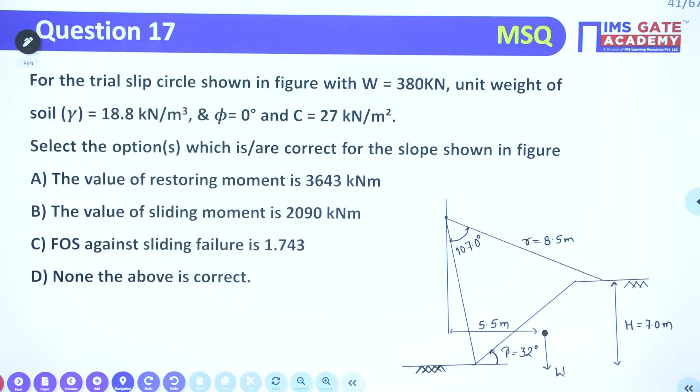It is saying that for the trial slip circle shown in the figure, you can take this circle. This trial slip circle has a weight of 380 kilonewton. Unit weight of soil is 18.8 kilonewton per meter cube, phi value is 0, and cohesion value is given as 27 kilonewton per meter square.

Select the options which are correct for the slope shown in figure. It is asking for the value of restoring moment, the value of sliding moment, and the value of factor of safety. Just let me know the correct answer.

I know that if this is the failure slip circle, this soil is going to slide in this particular direction due to its own weight, sliding with this point as the center.

It means the destabilizing force for this soil is the weight of this particular failure wedge. Clear? And what is the restoring force?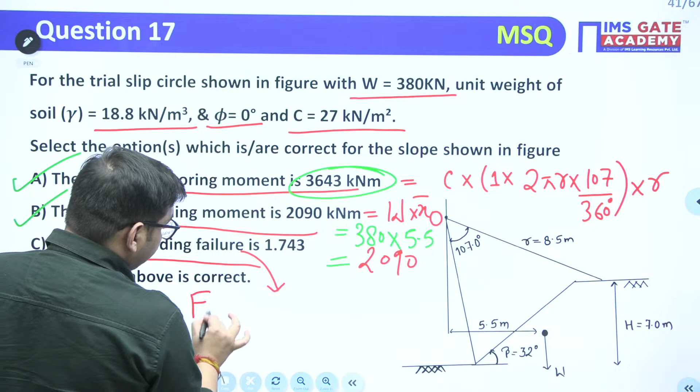I know that factor of safety is the restoring moment by sliding moment. Restoring moment was 3643, upon sliding moment 2090. So you will get the factor of safety as 1.743. This means option number C is also correct.

So what will be the correct answer? Option number A, option number B and option number C, all you have to mark to get the 2 marks. So if it is a 2 marks question, to get those 2 marks, you have to answer all the 3, A, B and C, all 3 options you have to choose. This is particularly an MSQ type of question, meaning more than one option can be selected and more than one option can be correct.

Now, this particular part is shear strength of soil and the stability of slopes. In stability of slope, you can also have infinite slopes, which is also important. There are only 3 cases for the calculation of factor of safety: one is the case of dry soil, second is the case of submerged soil, and third is the case of soil in which there is seepage. In that seepage case also, you have 2 conditions: when the seepage is below the ground level, and when the seepage is at ground level. So the formula for all 3 conditions should be known to you, how to calculate the factor of safety, since mainly factor of safety will be asked in the question.

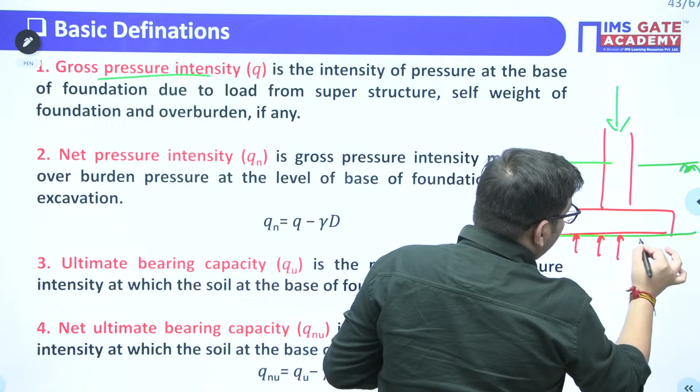And this is the superstructure load. Whatever pressure is acting at the base of the foundation, due to this superstructure load, due to the weight of the foundation, due to this soil, that we are calling the gross pressure intensity. So whatever is the pressure at this point due to all these factors - superstructure load, weight of soil, weight of foundation - that is my gross pressure intensity.

Now if I talk about this stress value at this point - the stress value due to the weight of soil was present at this point even before construction of our structure. The weight due to the foundation and due to superstructure came into effect after construction, but this weight of soil was there even before construction.

So if I don't take that particular stress value into account, that will be my net pressure value. So what is the net pressure value? It is the gross pressure minus the pressure which was due to this soil. So if Df is the depth of foundation, what will be my Q net value? It will be Q minus the pressure due to this soil.

What will be the pressure due to soil? We know it will be gamma of soil multiplied by depth of foundation. So we have just removed the pressure of soil from this total pressure value, and we got the net pressure.

Now this pressure value can also be greater than the strength or the pressure which your soil can carry. If I want to find out the maximum pressure my soil can bear without failure, that particular value you will call the ultimate bearing capacity.

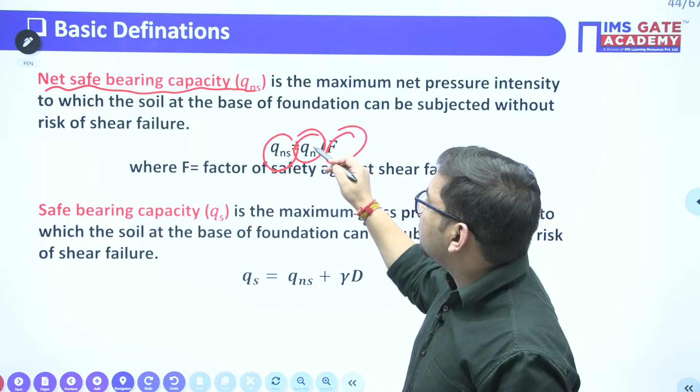Why are we calculating this? Let's suppose your soil can bear the maximum stress value of 50 kilopascal. It's not like you will load that soil up to 50 kilopascal only - you will take some factor of safety, loading it to only 40 or 30 kilopascal, so that if there's some increment in the stress value in future, it will not fail. So for factor of safety, you apply a factor of safety on this value, so that you get one pressure value which is net safe.

Another term is safe bearing capacity. Safe bearing capacity is nothing but net safe bearing capacity plus gamma df. We are not calling safe bearing capacity as ultimate bearing capacity divided by factor of safety. It is not correct. We know that Q is equal to Q net safe plus gamma into df, upon factor of safety.

If you write this formula this way, your gamma df is also divided by factor of safety. That means you've applied the factor of safety on the stress value coming due to the soil, but we are not concerned about that value being reduced. So we don't apply the factor of safety on this gamma df value. First apply the factor of safety on the net value to get Q net safe, then add gamma df. This will give you the safe bearing capacity of soil.

Now to calculate the bearing capacity of soil, we have different formulas. One given by Terzaghi: Q at failure equals C into NC plus gamma into df into NQ plus half gamma B N gamma. Here D is the depth of foundation, and B is the width of foundation.

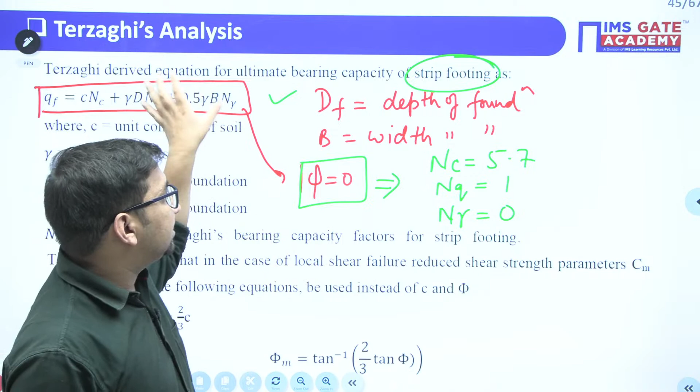was that it is valid for general shear failure only. If there is local shear failure in soil, you have to use modified cohesion value and modified friction angle value.

The modified cohesion value will be used in case of C. We know that NC, NQ and N gamma are functions of phi. So instead of calculating NC, NQ, N gamma for the phi value, you have to use the NC, NQ, N gamma values corresponding to this phi modified.

Next, for any other type of footing, the calculation of bearing capacity will be done based on specific formulas. If your footing is square, there's a formula for that. If circular, a different formula. If rectangular, another formula. You can remember it this way - the only change is 0.4 and 0.3. The 1.3 you have to remember, as it appears in every case.

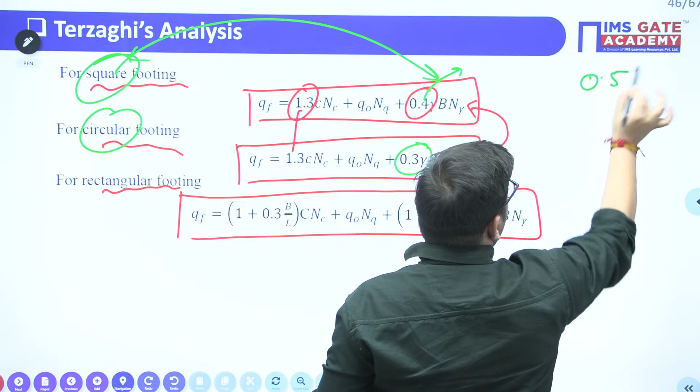0.4 and 0.3 are the two values students often get confused about. Here's a trick to remember them. For square footing, remember that 4 is the square of 2, so from square you can associate it with 0.4. For circular footing, it's 0.3. So to summarize: for strip footing it's 0.5, for square it's 0.4, and for circular it's 0.3.

You can also remember the rectangular footing value this way. Whenever you write the rectangular footing formula and feel confused whether it's correct, just put B equal to L. If B equals L, the formula should reduce to the form of a square footing. This is a way to check if you've written the formula correctly during the exam.

Now focus on the questions. Our main focus will be on questions.

There are some other important topics in this chapter, like the plate load test, which you should remember. Skempton's method is also important—you can just remember the formula from it. I've mentioned whatever is most important; it's not that other things aren't important, but we need to cover this in 3 hours, so it's better to focus on the most important parts, mainly the questions we need to practice.

Skempton's theory is important—remember just the formula. You can also remember the formula for Meyerhof's theory. For the plate load test, remember that data too; there are formulas for calculating bearing capacity and settlement based on plate load test results. There's also a field test for bearing capacity calculation—the standard penetration test. Remember the corrections there: we know the number of blows required for the last 300 mm penetration gives the SPT value, but more important is the correction—dilatancy correction and stress or overburden correction—which you should know.

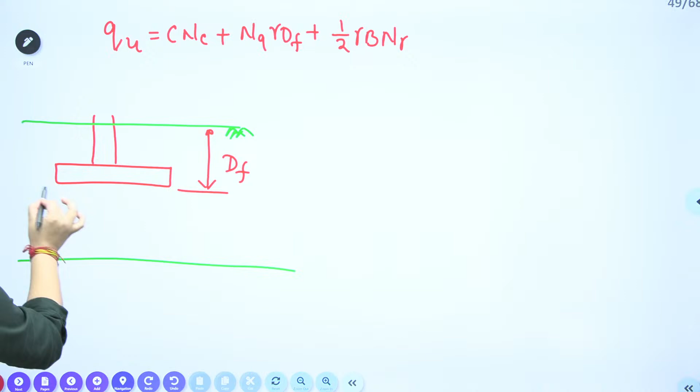If this is the foundation, this is the depth of foundation, this is the ground level. So from ground level to this, there is one zone. From this particular depth, base of the footing, up to this B value, there is another zone. Now try to understand, this particular gamma into DF term represents the soil of this particular portion. Whereas this particular parameter takes into account this other zone of soil.

It means, can you tell me what will be the gamma value here, at this particular point, if the water table is here? Let's suppose this is term number 3, this is term number 2. I am taking it as zone number 3, zone number 2. Can you tell me what will be the gamma value in zone number 3? Will it be saturated, submerged, or any other particular value?

Tell me, for zone number 3, which is from the base of the foundation up to the B width, it will be submerged. So now it is known to me that this gamma value is going to be gamma submerged.

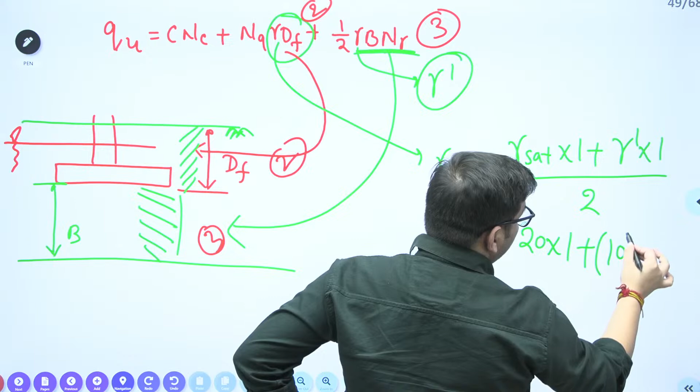So what is gamma saturated given to you? It is given as 20. Gamma of water we can take as 10. So gamma saturated is 20 into 1, plus gamma submerged, which will be gamma saturated minus gamma W. Gamma saturated is 20, gamma W if I take as 10, so gamma submerged will also be 10 into 1, plus 2, divided gives 15, that is 15 kilonewton per meter cube.

The rest is only that you have to put the values now. So what will be your QU? It will be C into NC. What is the cohesion value? It is 20.

C into NC. What is NC value? NC value is given to you 37.2, plus NQ. NQ value is 22.5, into gamma. Gamma will be, for this particular soil, gamma average, that is 15 into depth of foundation, which is given as 2, plus half gamma B. Half gamma, for this particular zone, it will be gamma submerged, that is 10 into B.

What was the B value? Width is given as 2.5, into N gamma. N gamma is given as 19.9. Sorry, 19.7.

Just let me know the answer for this particular calculation. I will also check how much answer I am getting. You just let me know what is the particular answer, and how much answer you are getting.

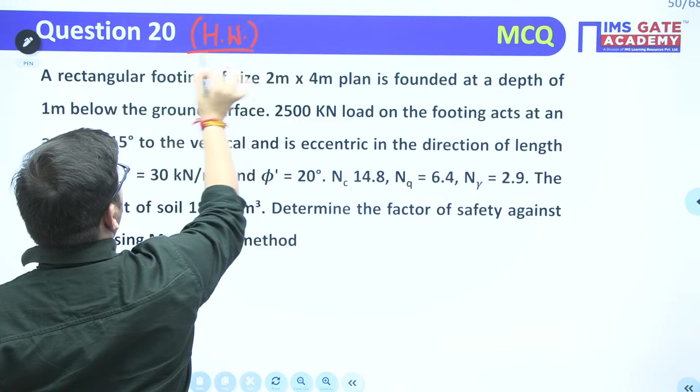There is one question for your homework, right? This is from the Meyerhof Theory, you can take it as homework. When I am giving it as homework, you should solve this particular question. These are also important questions, from Meyerhof. Everything I have included in it, eccentricity is also there, right? So just go through this particular question and whatever answer you are getting, post that answer in the chat box or comment box later. I will give you the answer, whether it is correct or not. So you can take a screenshot if you want, I'll just be aside. This is the particular question from your Meyerhof method, this one question will be sufficient to boost your concept of the Meyerhof Theory, right?

Next. Now if we talk about the pile foundation, in pile foundation mainly your question will be from the calculation of ultimate load carrying capacity, how much load your pile can take without failure. So calculation of that is mainly asked in the exam, and it is different for different type of soil.

If your soil is cohesive, let's suppose this is the particular pile below the ground having length L and diameter D. Also your pile can be of this shape, having the base as square, having the base dimension as B, and length of the pile is L. So mainly these are the two shapes which are generally used for your pile. Out of these two, any can be given to you.

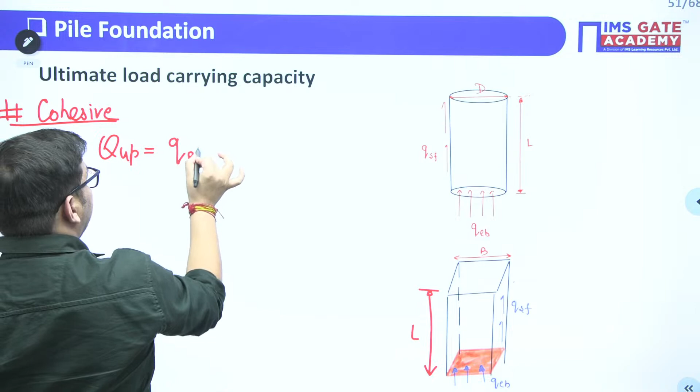So for cohesive soil, your load carrying capacity of pile will be due to this base resistance. If this pile is taking the load, that load will be transferred to the base, so from base you will get some resistance. Also there will be a side friction from the side which will help to take that particular load. It means QUP is equal to end bearing resistance multiplied by area at base, as it is generated at base, plus side friction resistance multiplied by area at side, as it is generated at the sides.

Now this QEB is given as 9 into C, that is cohesion value, into AB, plus this QSF is given as alpha C bar AS. What is this alpha? This alpha is your adhesion factor.

Remember that this alpha comes into account because if this is a pile, it is pile material, but here it is soil. So at this particular interaction, there is one soil particle and at the side there is pile material. So there is an interaction between soil and pile. When there is an interaction between soil and pile, there will be adhesion and not cohesion. If it is an interaction between soil and soil, in that case it will be cohesion.

Now this alpha term comes into account to take this adhesion value. If there is an interaction between soil and soil, this alpha value will be 1, right? When there is cohesion and not adhesion, this alpha value will be 1. So this is to take into account this adhesion.

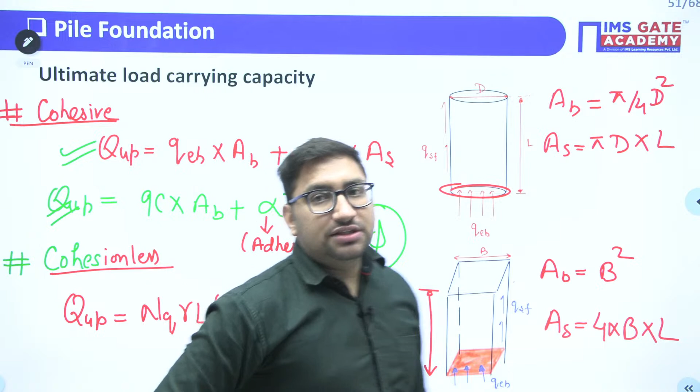This delta is the friction angle made between the pile and soil material. If there is an interaction between soil and soil, this delta will be equal to phi value. I hope it is clear.

Now if we talk about the group, generally in a group we have the piles arranged in a square pattern. Let's suppose there is a pile group having 9 piles, so it will be 3 cross 3. Whenever you install a pile, it is not a single pile, there will be a group of piles. So how much load this pile group can take, that you can also calculate based on the same formulas.

What you have to consider is that all these piles act as a bulk or block having the size of a square pile, like a square pile only. And what will be this width? If this is the second pile and this is the third pile, having diameter d, and if center to center spacing is S, this center to center spacing is also S. So this is d by 2, this is d by 2. So can I say that this total width is 2S plus d?

It will be 2S plus d. These are the 3 piles, then we got this particular formula. If there are n number of piles, so you can say it is nothing but n minus 1 S plus d.

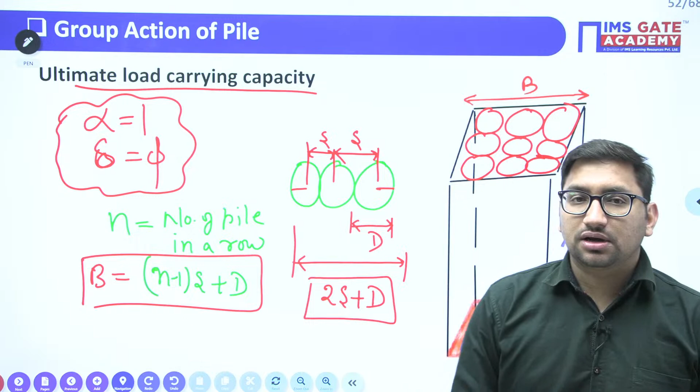Clear? As we know that for the calculation, you will only need this particular area. So once B is known to me, by this, I can find out what will be the base area. It will be B square. What will be the side area? It will be 4 times of B multiplied by length of the footing. Clear?

Based on this, this is the particular question. Again, I am putting this particular question for your homework. If you will find there is any particular doubt, either you can write me on the Telegram channel of official Telegram channel of IMS GATE Academy, there you can post. Otherwise, you can post in the comment box. I will give you what is the particular answer or what is the particular solution to this question. If it will be not clear to you, if you will not be able to find out this particular question,

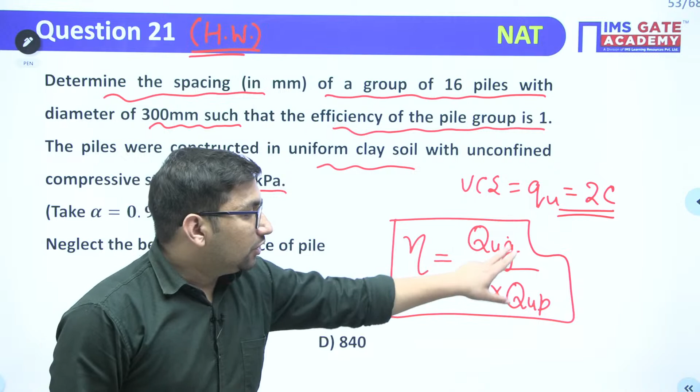But in QUG, when you will calculate the QUG, there will be one term which will be needed, that is the width of foundation. As there are 16 piles, it means one row, in one row there will be 4 piles. What will be this B? This B will be 3S plus diameter of single pile.

And this S value is only unknown to you. It is asking for that spacing between the pile. Clear?